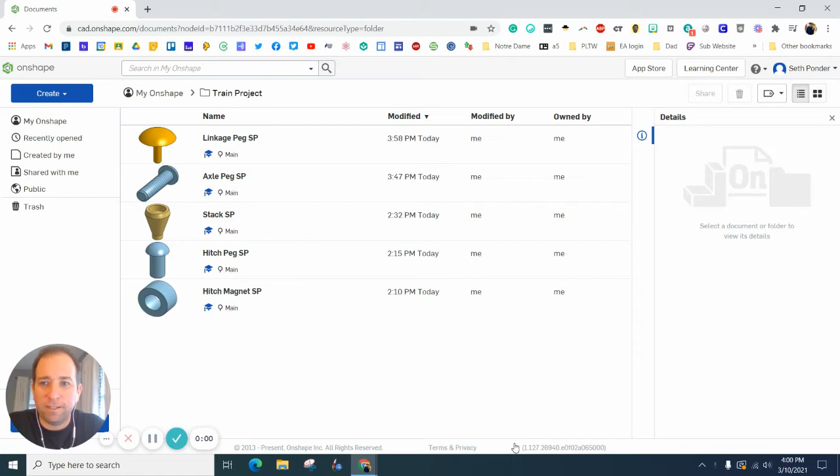Everybody, in this episode we are going to make the linkage arm. The linkage arm is that crossbar that holds the wheels together with the linkage pegs so that it turns the front wheels and the back wheels to swing synchronously.

All right, so let's hit create and document. Again, this is called the linkage arm. Throw your initials on the end so we know which teammate did it.

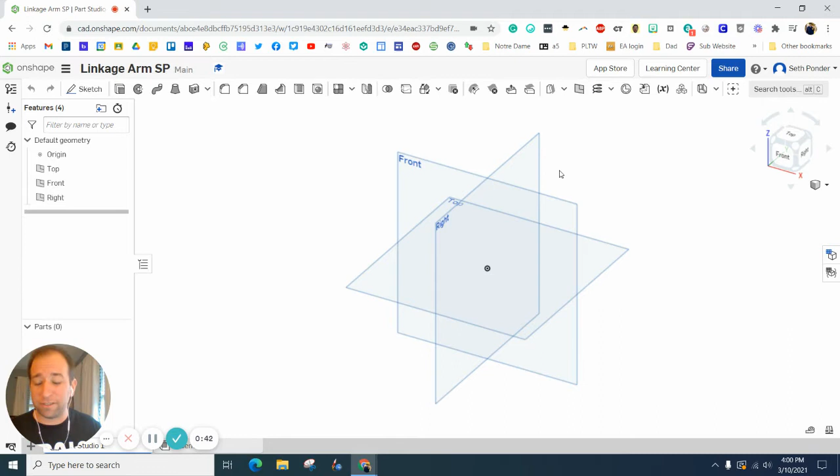All right, so I always encourage students to work smarter, not harder. So we're actually only going to make half of this, and then we're going to mirror it. Let's hit sketch, and I'm going to start with my front view on this. You can actually use your right view on this. I wouldn't advise using top view, but you do you.

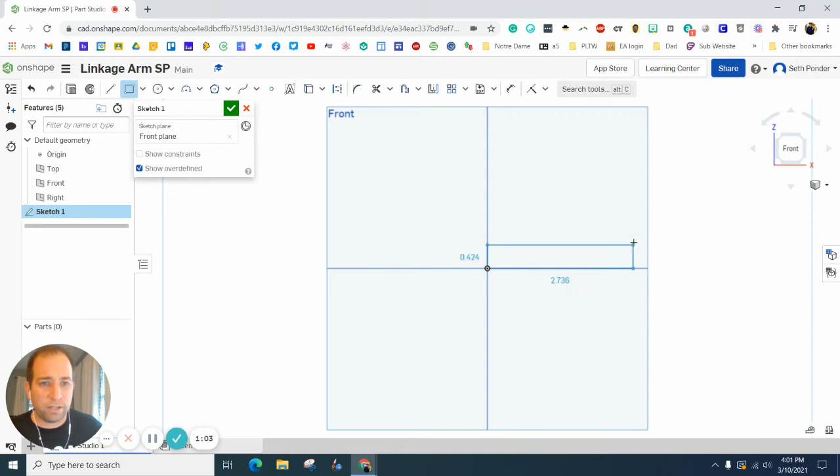All right, I clicked on the front, so I'm going to click on the front here. I'm going to start with a rectangle, start here, and go over. Let's dimension the height of this rectangle to be 0.25 inches and the width to be 3.5 divided by 2. All right, zooming in here, let's add a circle right in the middle.

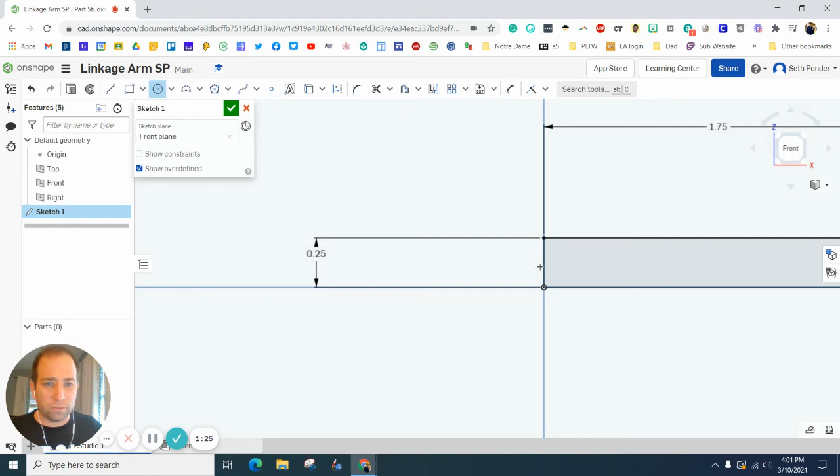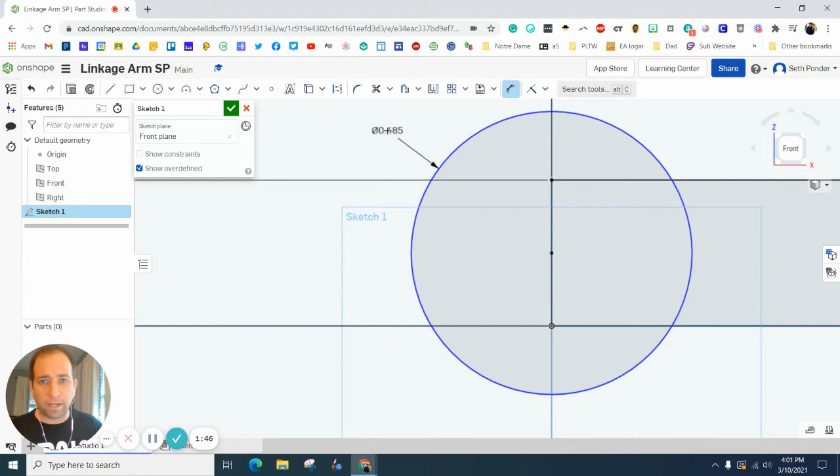If you zoom in, first of all I want to encourage you to zoom in because we got to do a little detailing here. If you hover over your vertical line here, a dot should come up or a gold square should come up, and that'll give you the center point. So now I know that my circle is going to be centered, and I want that circle to be 0.1875 times 2.

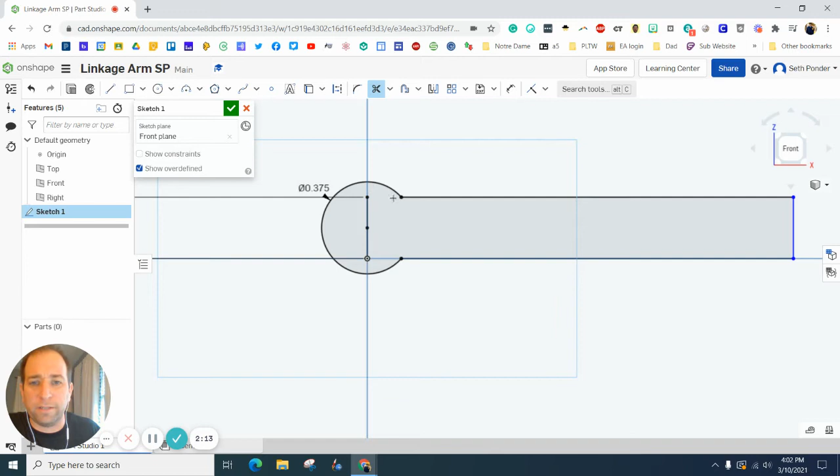All right, and now I can trim some stuff away. Let's see, can I trim this away? All right, and this way? Cool, and I can even trim that part away also.

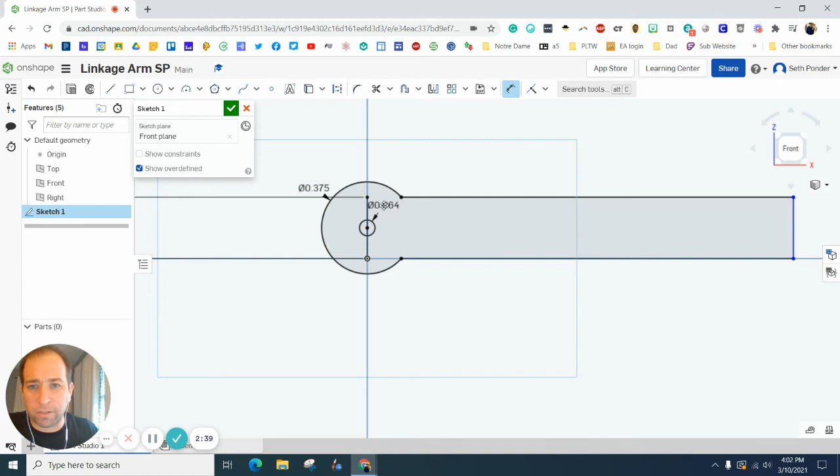I also want to grab a circle and go on that same point, and I'm going to make a smaller circle. I'm going to grab my dimension and I want to make that smaller circle 0.128, that's the diameter of it. For some reason I was thinking I've been dividing by 2 so much for the radius.

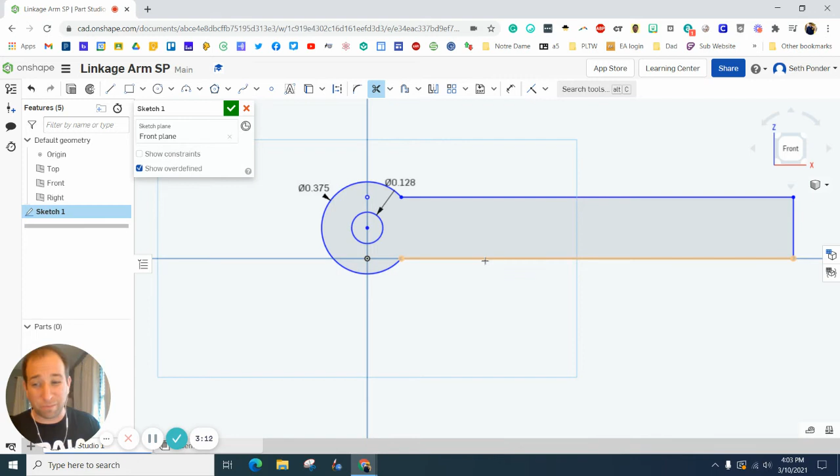Okay, so that's good. So let's grab this trim tool again, and I want to get rid of these vertical lines, I don't need those anymore. You'll notice it started turning blue and black, and that's because I started deleting some lines, so it's not fully constrained, but that's okay.

Let's go ahead and flip this so that I'm looking at the isometric view. I'm going to hit the green checkbox and extrude this right here. You'll notice, okay, so far so good.

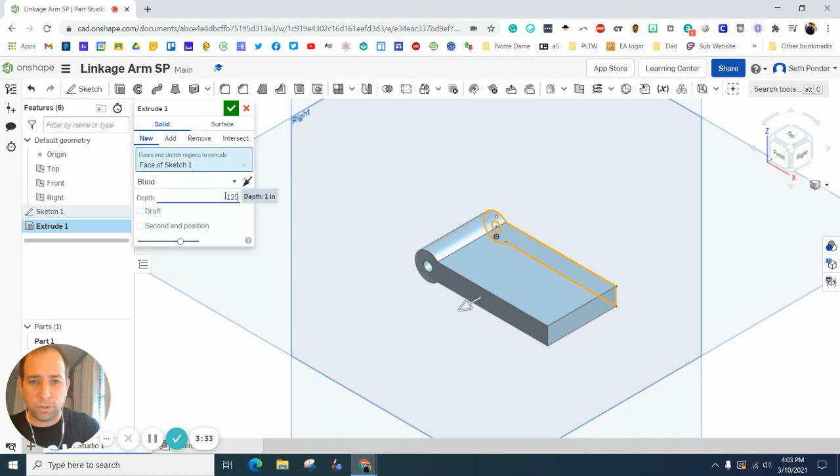We want the depth of this to be 0.125, and it's all good. Now, something I haven't pointed out is if you ever make a mistake, you can always go back into your sketch and edit your dimensions.

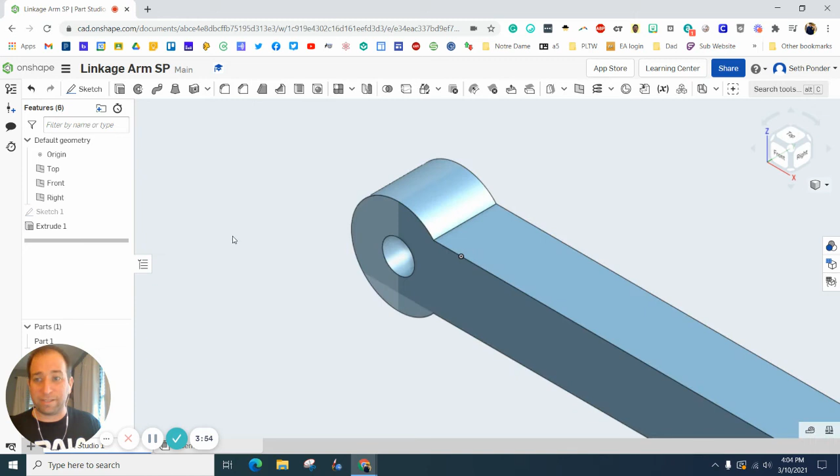If I made the mistake and said, hey, this is 0.25, you know, that just doesn't look right because it's not right. I can always double click here and put in the correct dimension as 0.125. So you don't have to start over.

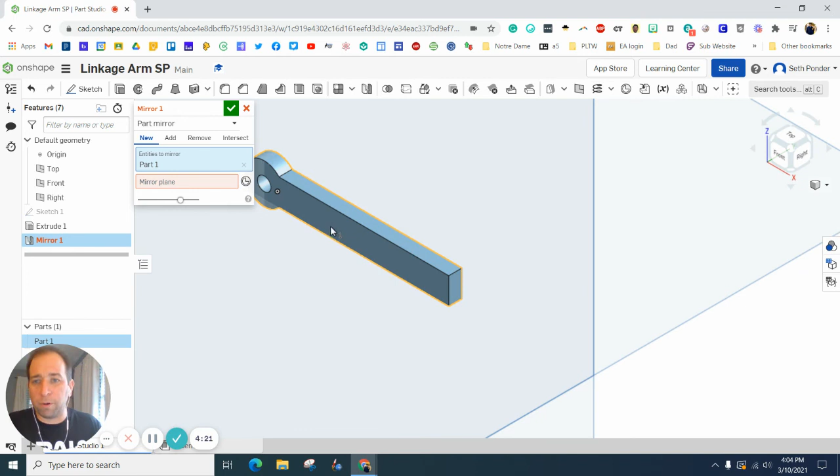Okay, so the linkage arm, this is half of the linkage arm. Let's do the other half. So what we want to do is find our mirror tool and mirror all of this. I want to mirror part 1, and the mirror plane I want to have is this edge right here, or that flat surface. I hit the green checkbox, and voila.

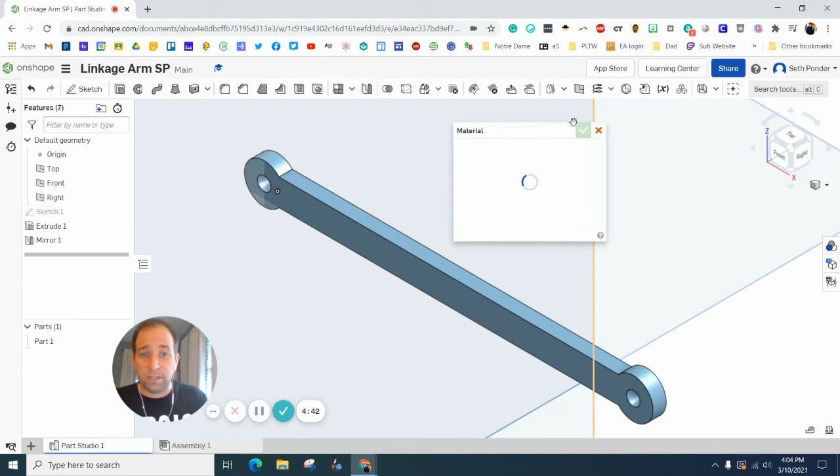I am practically done. The only last thing I need to do is right click on part 1, go to assign material, and then change this from none to ABS plastic, and hit my green checkbox. And now I'm officially done.

Again, if you want to, you can highlight and change the colors by highlighting, right clicking, edit your appearance, and make it a color that you like. I'm going to go with black. Boiler up.